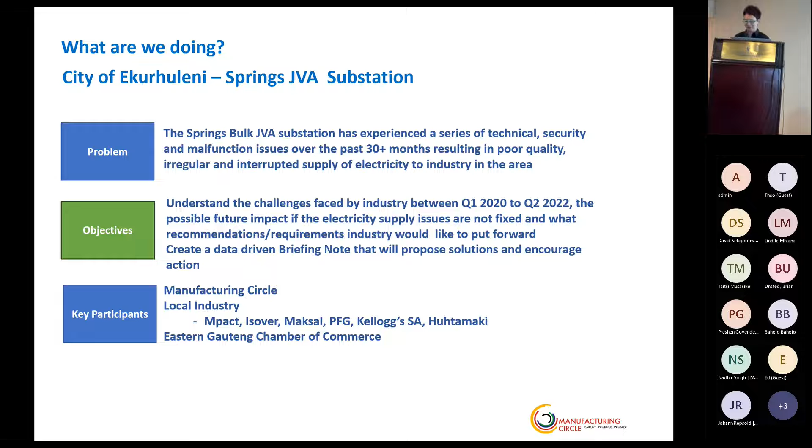It's really been a litany of frustrations and errors for quite some time. So we took the initiative to say, well, can we just map this out? Can we objectively - it's really not rocket science, if you don't have electricity, you can't function - but let's spell this out in terms of what this unstable power supply is, how it is impacting on operations, jobs, etc. Noting that in this specific situation, this has nothing to do with Eskom to the municipality - this is to do with municipal service delivery directly.

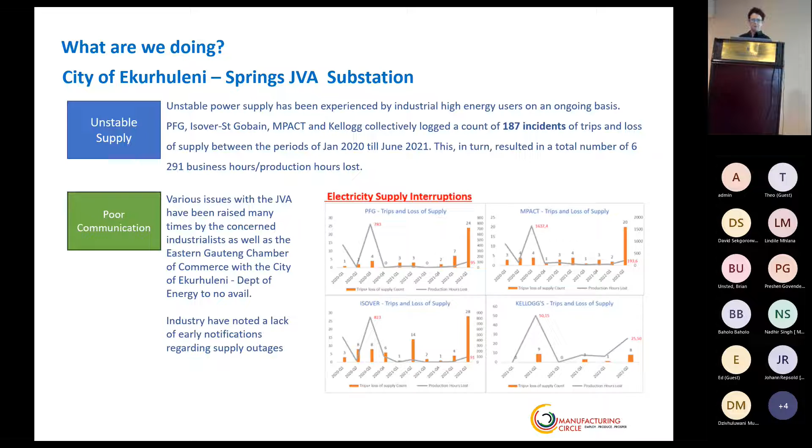We mapped out the interruptions, etc., and we came up with some pretty practical - we also mapped out the impacts. If you see the money spent across these different plants in terms of alternative supply, self-generation - that's not so much in the renewable energy space - we started to quantify that, and we proposed quite a simple solution at the outset in terms of having better engagement with the city, particularly the head of Department of Electricity and the responsible parties.

However, some of you may have heard the story. We put out this briefing note, we presented to the then mayor, who's now back as the mayor, and manufacturers have resident electrical engineer competencies - how can we work together? So that was put out on the 18th of October, and on the 8th of November, the substation burnt down to the ground.

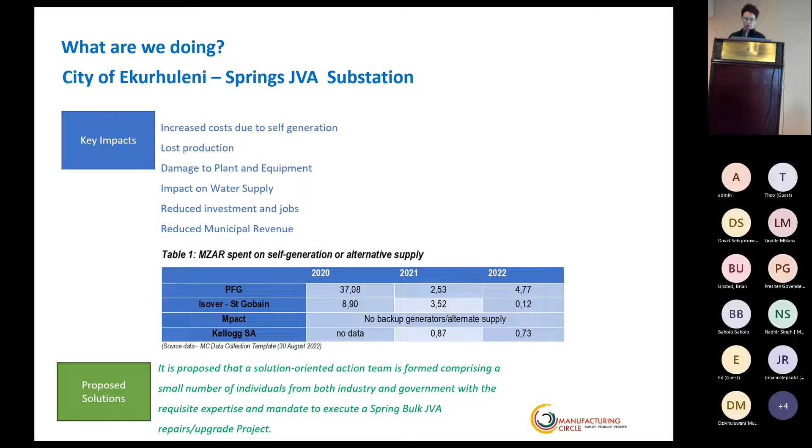And on that basis, it's been about 10 days. I think energy is slowly coming back, but one can understand and respect these catastrophic implications. So where to from here?

I guess I'm not being too rhetorical. Apart from the day-to-day firefighting, there's the action on the ground that these manufacturers need to address. But what really keeps me awake at night, as Manufacturing Circle, on behalf of our members and the broader industry, is how can we be doing things differently? What are our medium to long-term plans? Where can we become a little more self-reliant and self-sufficient, noting that there are different solutions for different opportunities?

I think that really is a scene setting as to what's happening from a very detailed, coalface level, and why we do feel it's very important to be engaging in a collaborative manner. There's wheeling, but then there's cost of supply studies that have to come first, and even with wheeling, you still have to have a substation that works. So I want to understand those things so that we can come up with some proactive solutions, because this is really where we're heading. Thanks, Rob.

Thank you, Philippa. I don't know if there's any questions now for Philippa around what Manufacturing Circle might do. I hope your next example will be a slightly nicer finish to the story rather than burn down. I hope so too. But any specific questions before we move on to James?

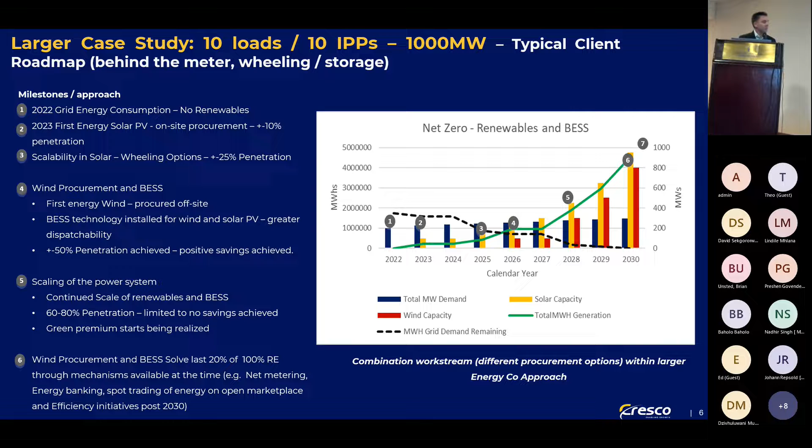We now have a smaller case study: 100 loads, 27 munis - I think that's the hard bit. An 80 megawatt load, similar technology, so on-site PV, wheeled PV, and things like that, looking at different wheeling, focused on perhaps municipalities that are more wheeling ready. We do have a view on wheeling readiness at a conceptual level, but same technologies.

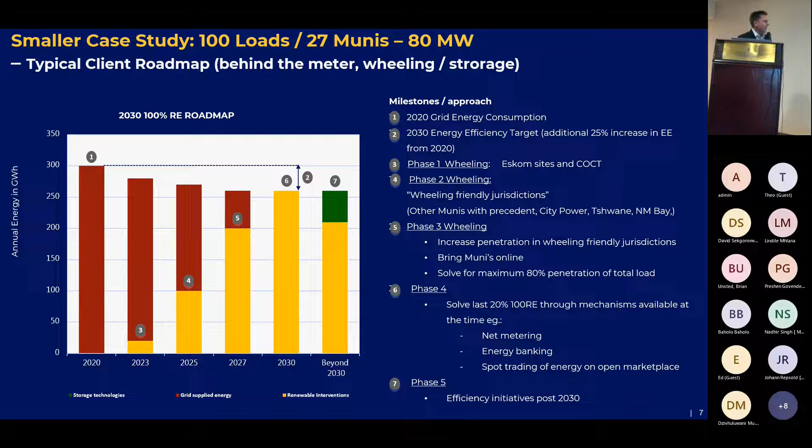But the storage option for this client is very different. In many cases, they're running diesel generation already, and therefore 40-foot container batteries is already at the price point, and they have the ability to install these and offset it. You obviously need to charge batteries with energy, so if you have load shedding and you can't charge the battery, that is also a constraint. We're working around that, and that's linked a little bit to the load shedding strategy. But everyone is largely using similar technologies at different approaches.

Now, in terms of a decarbonisation world, we have phase 1, 25% penetration, and this is what was set in 2020: single assets, PV or wind, variable tariffs, not dispatchable in any way, debt and equity termination values. What we're seeing with many of our clients is they're trying to balance achieving renewable penetration along with CO2 targets versus savings, because this still needs to make some financial sense.

This idea of paying a green premium works okay if energy is 5% of your cost base, but if it's 20% higher, it's just not affordable. And if you add all the other costs of doing business in South Africa, you can't actually afford to pay a green premium versus the termination value.

So the cost, or even on an IPP basis, of the guarantee for this can be pretty big. If you just took a typical utility scale PV project, 1 megawatt costs 20 million rand to build. Simplistically, if you procure 1,000 megawatts, and you have to put up your full balance sheet of debt and equity, that's a 20 billion rand balance sheet impact - and that's before we add storage. If you add storage on 1 megawatt, then you're up to 30, 40 million rand a megawatt. So the size of these renewable interventions versus the balance sheet is just impossible.

But as the projects are progressing and as penetration is getting higher, the market precedent is increasing, wheeling's increasing more, we are super comfortable with the technology, the regulatory certainty comes, and we are seeing that termination values are decreasing. Therefore, theoretically, you can afford different technologies with your same balance sheet.

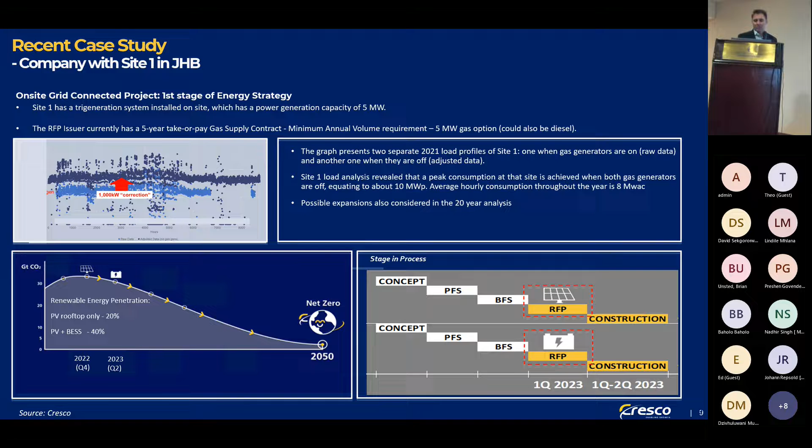Now, what we did was, as you do, we have this theoretical target of 100% renewables. We then did a whole lot of analysis around different BESS dispatch profiles - what could we get to? This is a very simple example, a 72-hour period in the year.

Typically, you might have Tuesday the 22nd, where there's not great generation because we have cloud. We have a semi-cloudy day, and then we have a non-cloudy day. So when you break those down to P50 hourly analysis, you have this volatility that comes into your standard analysis.

So over here, we have gas generating, we have the PV to the load, we have the PV dispatching to the battery. One of the options with a smaller PV and a smaller BESS is the fact that we will only offset peak demand. And this for us is probably the first point of financial metric, because we know peak tariffs are substantially higher than non-peak tariffs. With this amount of overgeneration, you could put in place a small BESS that will dispatch for only 2 or 3 hours.

Depending on the PV availability, it depends on the penetration level you have in the BESS. If we have the ability to get much higher PV on site, and in some cases there might be a piece of adjacent land or even someone else's rooftop next door for some clients, we can then oversize the PV generation, significantly oversize the BESS, and change the BESS dispatch profile. In this case, we have the benefit of being able to run the gas more consistently.

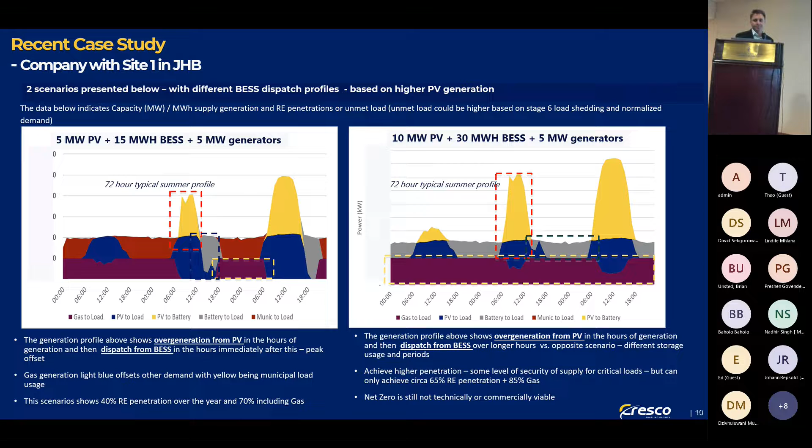Okay, Eskom and Eskom wheeling and unbundling. I think what Eskom has done in the last couple of years in terms of what they say is what they're doing, and let's talk about the unbundling rather than power station and EAF, different department. They seem to put their money where their mouth is.

Not that they, I think, have been the problem. I think it's generally been political will to push through. But we have seen the system operator, the split of the legal entities, and I know the current retail tariff application of August this year is the first start of unbundling the tariffs, until eventually you theoretically might get 3 bills from distribution, transmission and generation, or if you're wheeling, you might get 4 or 5 bills, of which Eskom is just one of your generators.

But we believe by 2027, we potentially could have a full day-ahead balancing market in place in South Africa. Maybe not a fully traded market, but there will be a number of bilaterals happening, and balancing power - which relates to James's comment that we need to make sure by 2030 we have something real - this is really important to unlock renewables, because you need to sell the excess energy, there needs to be the power going through things. So this regulatory constraint is probably one of the biggest issues for us outside of NERSA regulation.

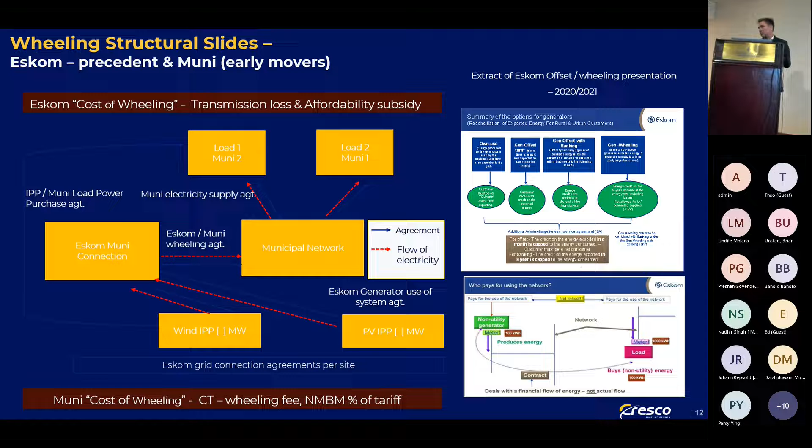So, cost of wheeling. I'm using an Eskom regime, and 12.9 cents is the answer. It's pretty simple, I don't know why people make it so difficult. But it does depend on the generation profile of the generator use of systems charge, the load profile of the load transmission zone, the load voltage connection, and how Eskom treats the subsidies. That all really drives the 12.9 cents, and it'll change over time.

So what we get involved in is, as part of the push towards this theoretical 100%, our renewable procurement, we're looking at different technologies and calculating the NPV of savings. For us, the wheeling cost in an Eskom connected site is simplistically the difference between your savings on wheeling and the cost if your theoretical generator was sitting behind the meter. That is simplistically the Eskom wheeling cost.

You don't see that in an Eskom bill because it's the difference between the credit and the losses. On munis, you will sometimes actually see a municipal wheeling fee. But for us, that's probably the easiest way to describe it.

The next question is, it's not actually about the savings today. The Eskom wheeling spreadsheet works really well looking at today only, or maybe next year, and you can put in next year's tariffs. But when you're looking at 20 years, there's a number of changes. The retail tariff pricing that was recently submitted has given us some view of what can change, plus I think Cresco has a view of what could also change over time as cost-reflective tariffs come back in.

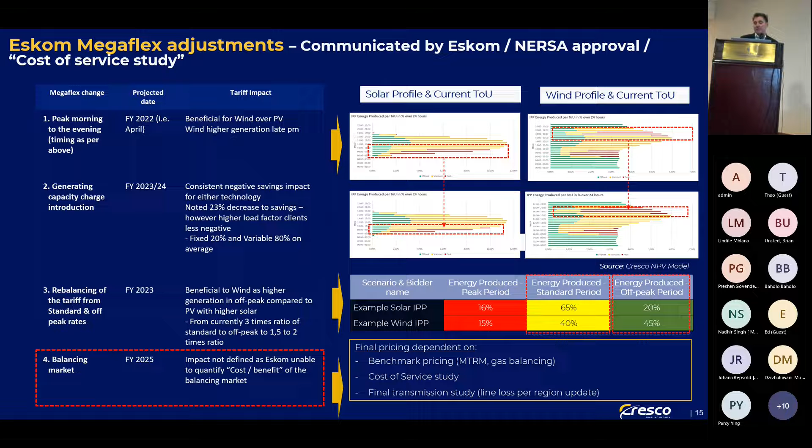This is what energy companies need to consider right now as part of their energy strategy. So it's not just random.

In terms of analyzing NPV of savings, honestly, looking at the generators is pretty easy because we know what the benchmarks are. The IPPs hide a bit in OPEX, but there's only so much they can hide. We have a fairly good idea of what's real and what's not. I'm conscious that debt terms today versus debt terms at financial close is probably the big issue at the moment - swap rates and so on - and my colleague Jaco will unpack that a bit later.

But the biggest question we spend time on is actually looking at the load, because we generally don't have one generator - we're looking at a number of generators over time, and their demand and time of use over time. There are summer-winter splits. If you're a mine, you have life-of-mine coming off, and new mines coming on. What are the macros around that?

So Eskom's long-term pricing, US CPI, how Eskom tariff adjustments are affecting things, this idea of deemed energy or excess energy when you start piling too much PV at the same time of day, and ultimately the balance sheet impact.

So when we do an analysis as a transaction advisor, this is pretty much where we spend most of our time. Admittedly, you probably have more than one generator, but for us this is a lot more transparent, because in many cases this is a bit of crystal ball gazing. So for a 150 megawatt PV project and a 330 megawatt load - you could say 15 and 33, the principles are the same, just maybe not millions, you'll have hundreds of thousands, but the same idea.

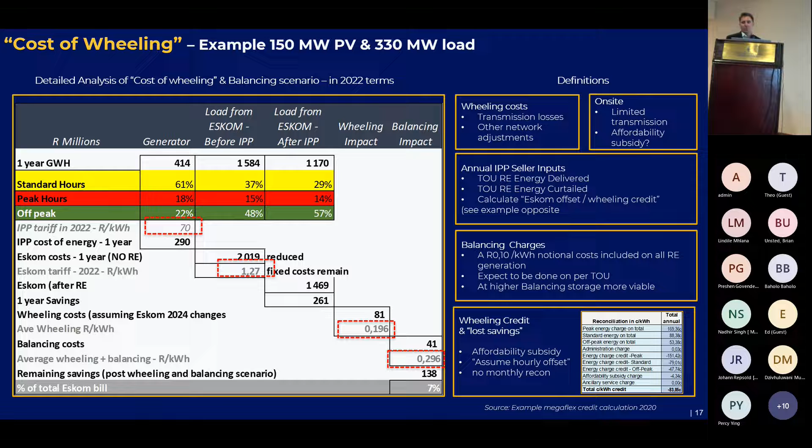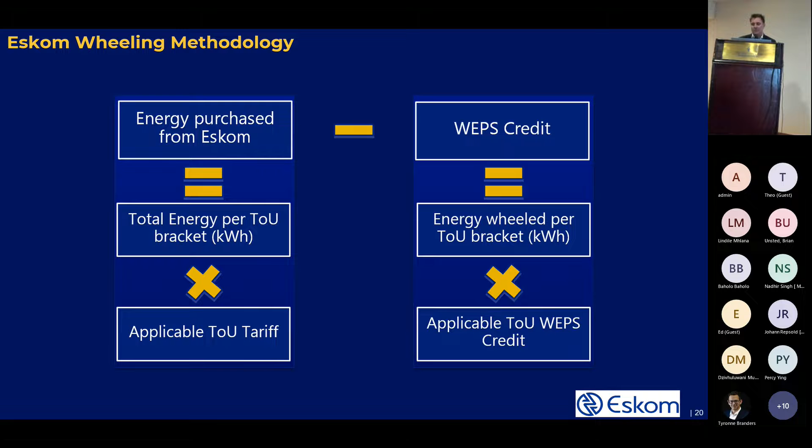In the Cape Town scenario, there's a fair bit more complexity, and I don't see my colleague who did the analysis here, so if you have very detailed questions, I will answer them later. Basically, Cape Town has issued a wheeling fee, a tariff book, which you then pay for the wheeling, the cost of the wheeling, but you're also paying for the energy. It makes the whole tariff discussion and calculation substantially more complicated, adds a fair bit to the Excel calculations, but we think we've managed to mimic it correctly.

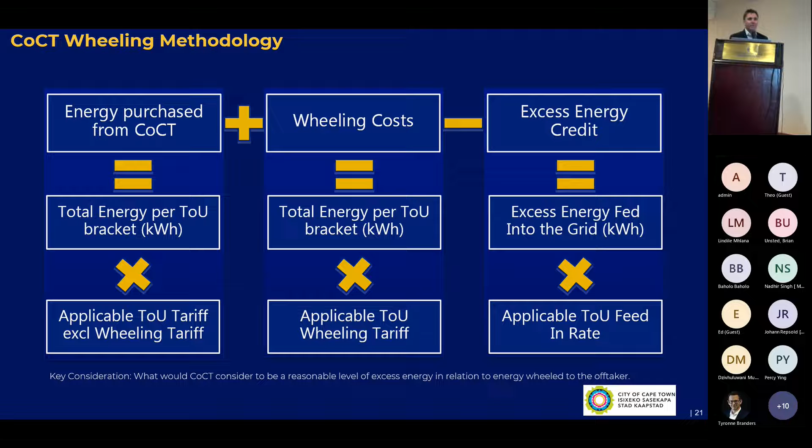Unfortunately, we don't have a lot of precedents. Unlike Eskom, where we can actually run our Excel model and compare it with a bill, in Cape Town we don't have that, so we are inferring some of these. That's my legal caveat around the numbers we're showing, but we think it is hopefully pretty straightforward.

Unfortunately, when we mimic other municipalities, which we haven't done as much work on and therefore not presented graphically, we see a similar situation, where the municipality's credit is substantially lower than an Eskom equivalent.

And that does require, to a certain extent, either the client starts paying a bit of a green premium for wheeling, or the client needs to start procuring bigger amounts or bigger projects to get the benefit of scale. Because obviously a 10 megawatt project is not going to get the same tariff as a 100 megawatt project.

Rob, have you shared this analysis with City of Cape Town? No, we are engaging with them at the moment, but we haven't actually presented it to Cape Town.

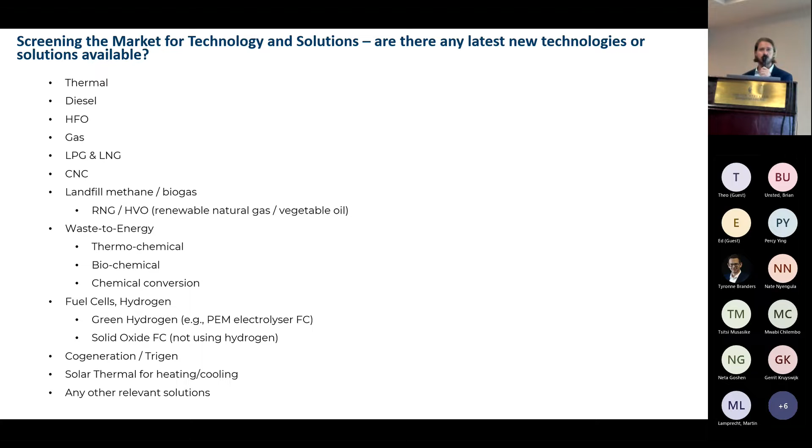From Cresco's side, we've embarked recently for some of our large corporate clients on looking at upgraded solutions that are available on the market. As South Africans, we all know that there's been a number of fly-by-night solutions that we've all come across in recent years. But at the same time, there's existing reputable players that are upgrading their solutions, and also new players coming on board globally, where perhaps could be a good fit for us. I've just listed some of those on this slide.

Also just looking at optimizing on-site diesel generation and fuel supply, looking at things such as optimizing contractual arrangements, looking at putting in backup and additional options to build in layers of resilience. We're seeing, in the global case and in our case as well, that's obviously key - just bolstering it with layers of resilience, because the point is to make your business as autonomous as possible. Where you are in the country, you might have better or worse luck with regards to different things, but we're working with a couple of our clients on this, and we'd be very happy to look at this with some of you from the corporate energy user perspective.

In my previous job before Cresco, I was working at Abengoa. One of my roles there was head of microgrids. I had quite a lot of experience working globally, looking at microgrids using both renewables and fossil fuel generation and different types of batteries. We did quite a lot of work in the Caribbean, in Florida and California. We did quite a lot of work back in 2018, 2019 in California, which was getting hit quite heavily by wildfires. PG&E, Pacific Gas and Electric, and some others raised some tenders.